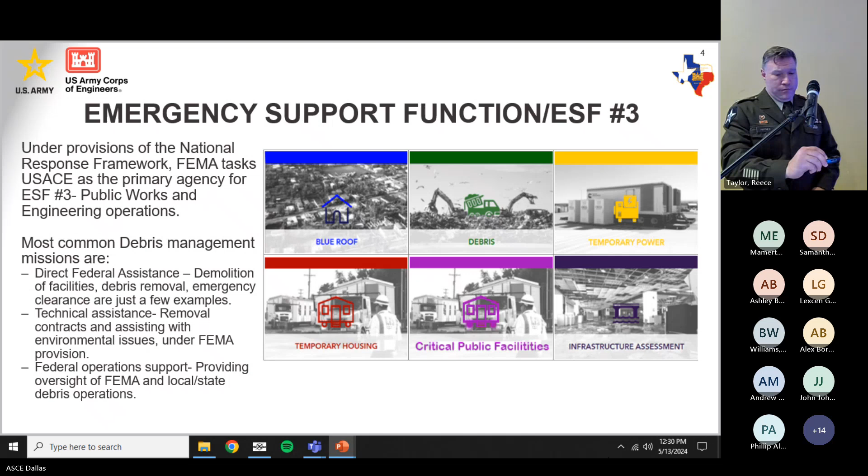Okay, so we'll get into the timeline in just a minute, but for everyone who hasn't been to Maui or Hawaii, this is kind of what we're looking at. The Lahaina area is the one that's been impacted the most. There were a number of wildfires that popped up throughout the island of Maui. Lahaina is important because it was actually the original seat of power for the Kingdom of Hawaii before they became a state. They have a number of their ancestors born and buried there. It's very interesting.

Right off of Lahaina, they have a birthing stone where the future kings and queens of the kingdom were born. The mothers would go out into the water, and there's a flat rock there—it's very, very impactful.

And then we have King Kamehameha the Third—he was buried there in Lahaina. It was the seat of power for a long time, when King Kamehameha brought all of the tribes and clans together and made it a unified state. There's a lot of history and culture there, and the culture of Hawaii is deeply connected with their ancestry. We have a number of public leaders and personalities that we owe it to, to preserve that lineage.

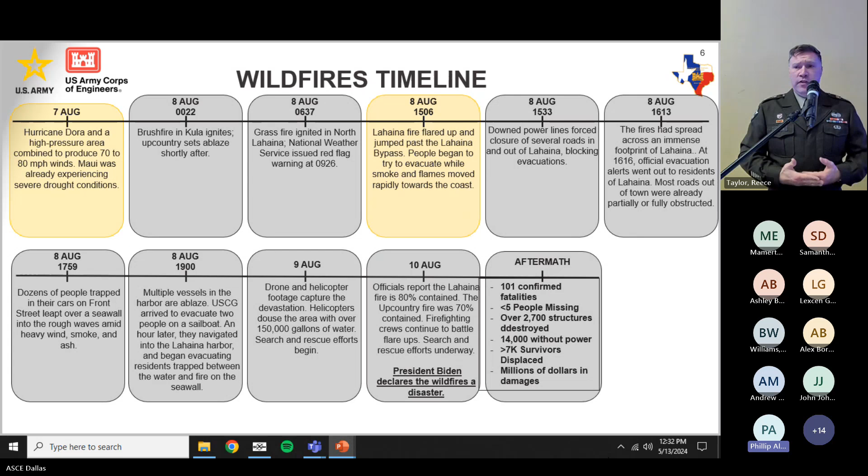So the timeline very quickly, the fires kind of sparked up on 7 August. Myself and my emergency management chief, Mr. Jeff Mahaffey, we deployed out there with the initial response team on the 12th or 18th of August. The fires were still occurring. We understood the impact it was having and the likelihood of it being declared a national disaster by the president, which would free up federal resources to react. We wanted to get the lay of the land and see where our folks would be, where they could immediately help, and what the mission was looking like. By the 10th, the president declared a national emergency, and it was in full running mode with FEMA as lead on the 11th.

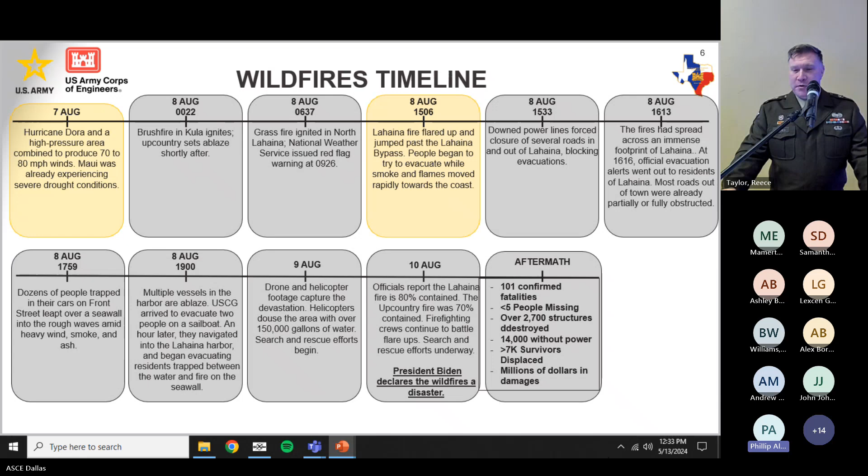And we can go through - I mean, any one of these briefs can last all day, so I'm purposely hitting the waypoints, the wave tops. This is another depiction of the timeline.

We sent our initial debris response, and what that looked like was about a 6-member team ranging from a project manager to project engineer, real estate specialist, contract specialist. We got out there because we don't do anything by ourselves. The Corps doesn't. We entrust and depend on our local partners, as well as the community around us, to give us the contracting capability so we can execute the mission set that's been given to us.

Key takeaway here - on November 3rd, we also got, so FEMA, because we didn't know what the requirements were and what the state could handle. When we get the mission set, it's really a negotiation between FEMA and the state. Texas is really good about executing their own mission sets, and then they raise their hand and say, can y'all help us out with one or two things? Other states are not that way because financially, they depend on the federal government to execute some of their mission sets. Hawaii is in that realm where they don't have the contract capability, the labor pool, the equipment, or the functions and mechanisms in place to execute these mission sets. So it decimated Hawaii, Maui, and they didn't have that capacity to execute. That's when they reached out to FEMA, and it becomes a negotiation of what do you want us to do, what can you do by yourself? And that slide rule changes as time goes on.

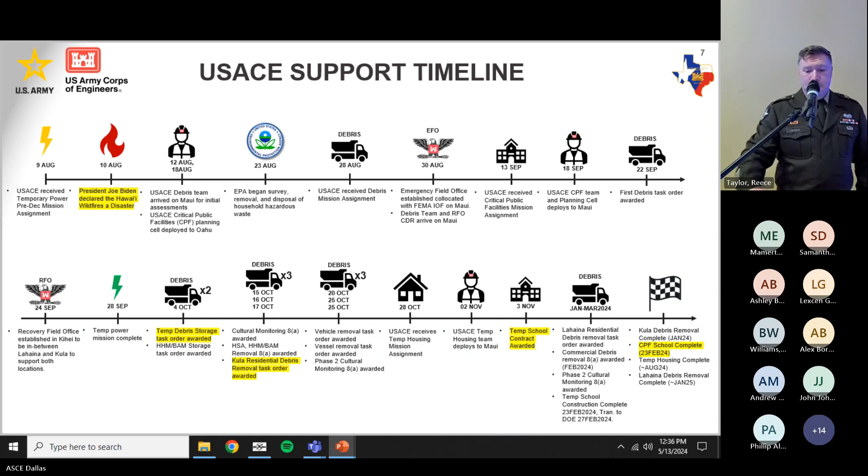This was taken a couple days ago, so it's a little outdated. However, you can see that we've cleared the parcels, and when we say clear the parcels, there are certain requirements - you've got 3 standing walls, that's a domicile, a facility, a building, and we want to leave that as best we can.

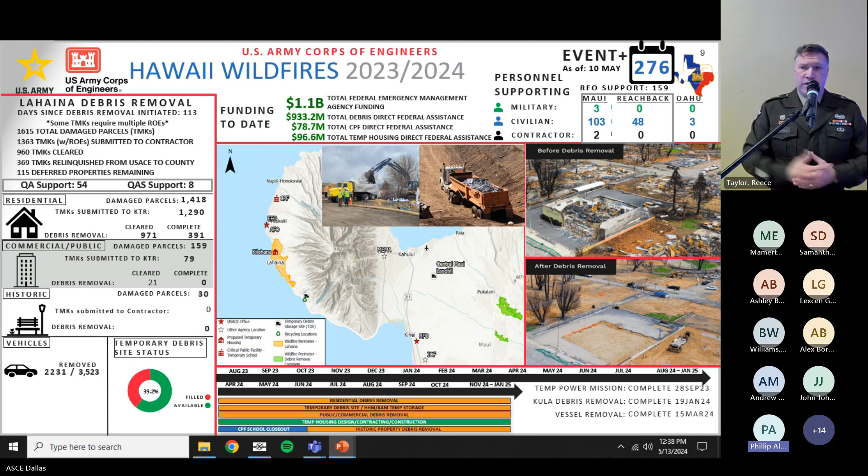If it's got less than that, we will clear it to the bedrock, or to the dirt, or to the foundation. It really depends on what was there first and what it needs to be, but we want to make sure we do it responsibly. When we return it to the citizens and owners of that property, they're able to build as they'd like on a new piece of property, working through the state and private sector to reestablish their homes.

Of all of those, Hawaii is very, very interesting. They don't have AC because it's a tropical environment. What they do have is usually just window units, but that was offset and mitigated by the crosswinds from the windward to leeward side of the mountains. Think east and west - the normal flow goes from east to west, and they have jalousie windows, the ones you crack open, to really cool things down.

That kind of helped. That was one of the reasons the wildfires got out of control so quickly - there was a tropical depression, a hurricane down south, and it was causing that spin and just fueling the fire. This school system only had one building that was untouched, and even in that building, the electrical conduit had melted. It was gone. So we've reestablished that.

You can see here on the 23rd of February, I think I was there again - that was my last day on Maui. That was the day we recommissioned and gave it back to the Department of Education there in Hawaii. Again, point being, we're training, we're teaching the kids that are going to be the new generation. To have that quick turnaround is not normal for us. We will go in and rebuild a facility and our timeline's 5, 6, 7, 8 years depending on the complexity of it for the Corps.

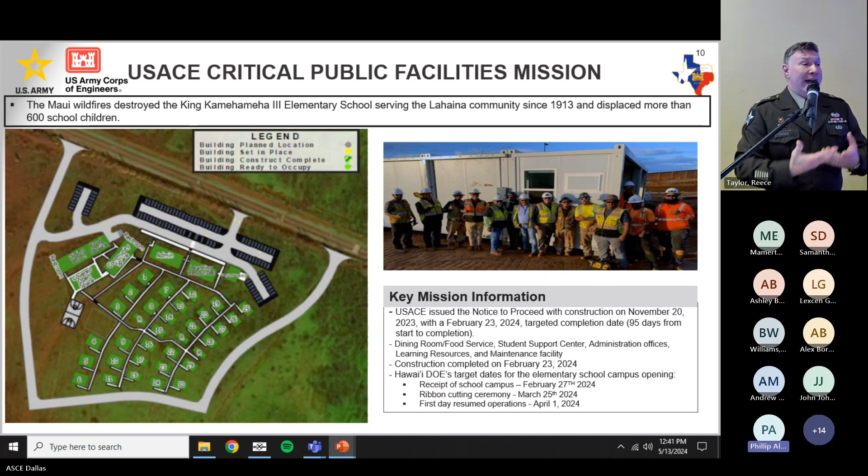Some of the other things we've established working on with this mission set is other critical infrastructure - we're building temporary homes. Some of that looks like relocatable homes, but we're having to bring all that raw material and resources from off island, and that's not something we can easily do. We're talking 500, 550 homes that we're trying to reset up in the northeast or northwest of the island, to ensure the economy gets back to the tourism they're used to, because about 80% of their economy is based on tourism. We're trying to help this community as quickly and safely as possible return to normal.

Okay, so again, that was a very quick rundown of what we're doing in Maui. I failed to mention, the debris mission set is a rotating thing - we have about 6 other districts within the Corps, and that's a rotating thing where they determine who's up next. On the Oklahoma tornadoes that just happened, the mission was given to the Kansas City district, and they're doing the blue roof mission, technical assistance, and technical monitoring to ensure they're getting in there, cleaning up those communities and trying to return to normalcy as best we can.

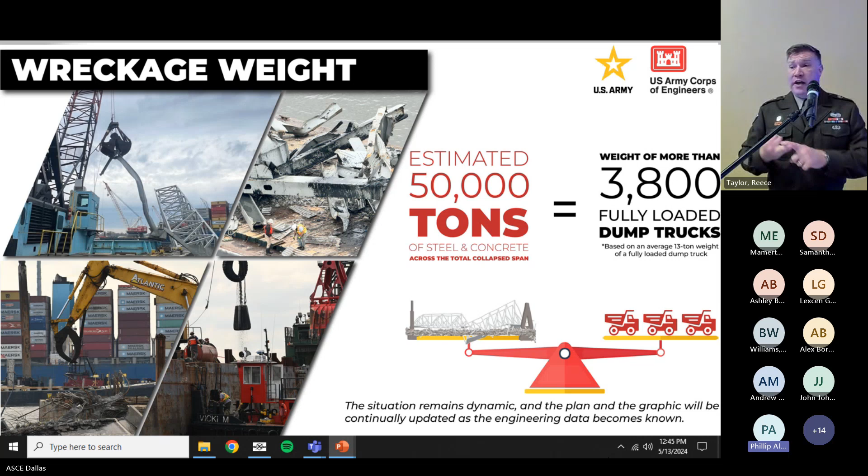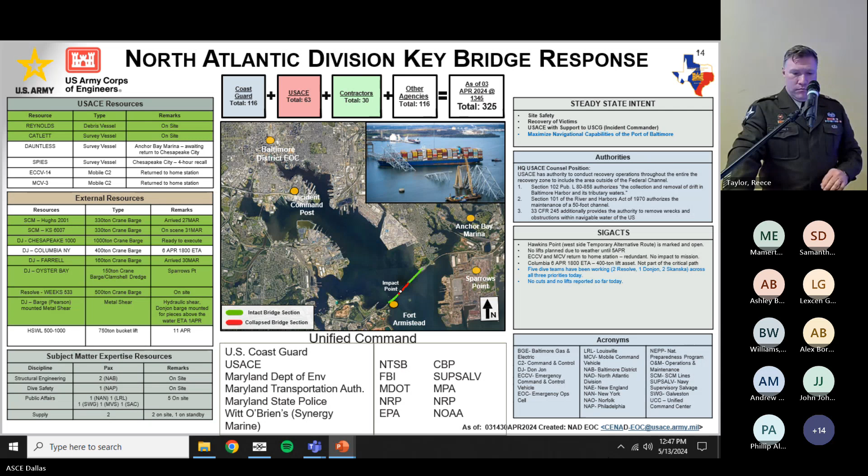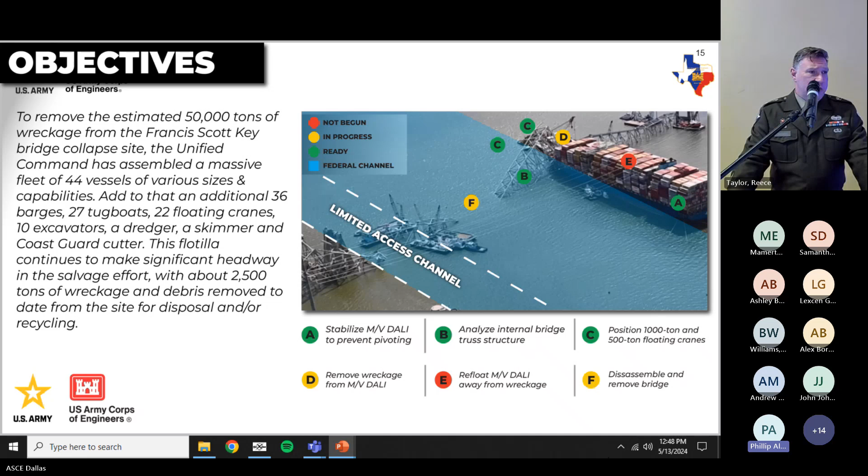This is a graphic that we use to capture the daily activities, where we're at on the timeline, and to quickly articulate what our objectives are: clear the channel, refloat the Dali, remove the remaining wreckage.

This is not the whole bridge, it's just three spans, and it's taking this much effort to fix this bridge. We're not even talking about rebuilding it yet. We can't, because we have to get the old stuff out of the way.

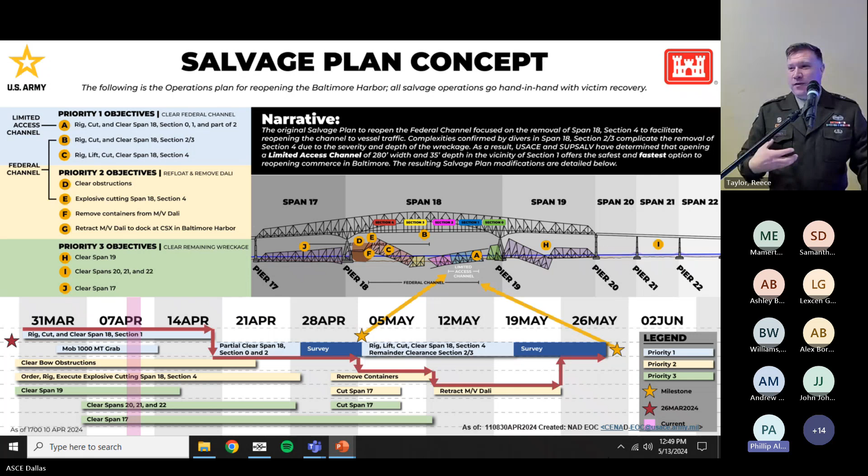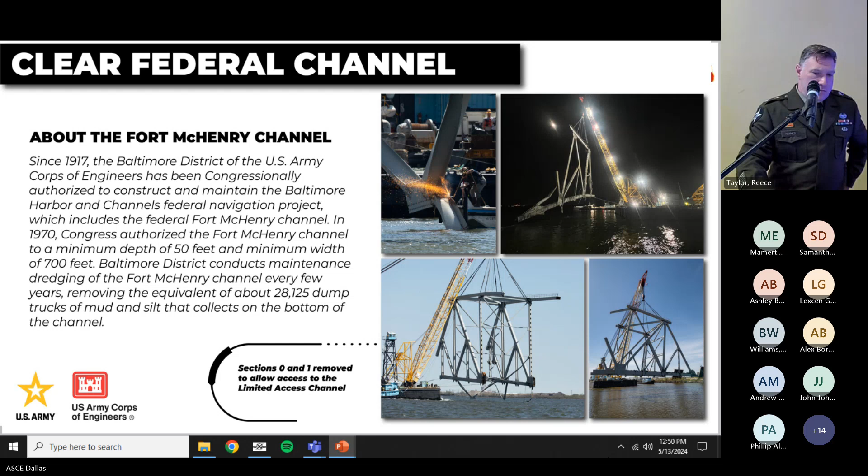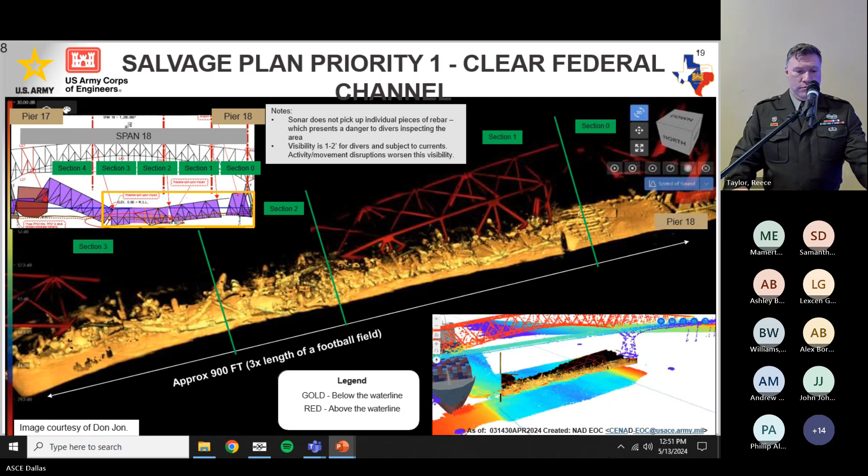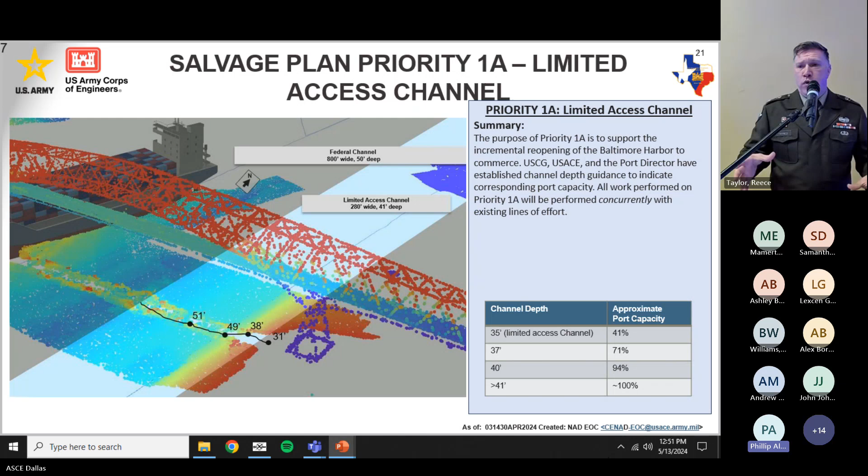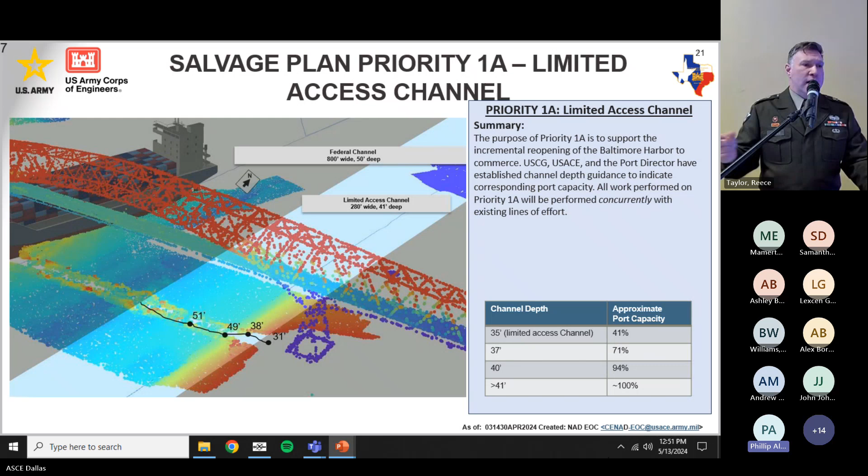Here's another visual. One of our immediate objectives was to clear the federal channel. We've taken that in bite-sized pieces, asking what we can do right now to open up and get commerce back into the port. We've partitioned it, looking at a limited access channel with a 35 to 38-foot depth so boats can get in and out of the harbor. However, our goal is to get back to the full 50-foot depth and use the whole channel. But this will allow us to start executing business on a limited basis.

For the magnitude of the problem set: that little circle up there, that's a guy standing there, and this isn't a small problem. Physically, it's not a small problem. Looking at the tonnage involved gives us another snapshot of what we're dealing with.

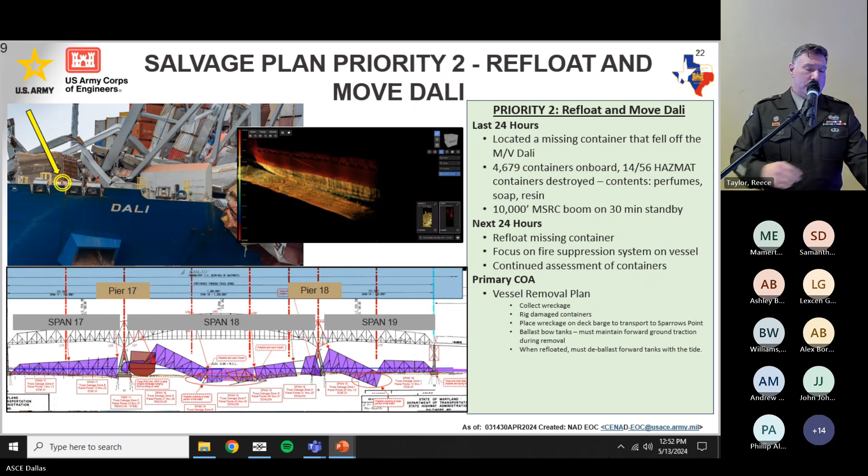So, dive operations. As Army engineers, one of our aspects is Army diving. We have divers in the water looking at this problem and trying to best choose the cut points they need without that thing falling on top of their heads. It's very dangerous. That very low visibility picture is what our divers are seeing underwater.

So they work in partners, a primary diver and a secondary diver, as well as video support. We have somebody on the seashore or on a boat nearby working with that diver to ensure they're not getting snagged on rebar or any jagged steel in the water. It's a very difficult mission set, and that's one of our tenets.

We don't want to put anybody in the water unsafely, and the environment has a say. If it's stormy - a couple weeks ago there was a pretty big nor'easter - we couldn't execute operations because our guys on top of the water couldn't operate safely for the guys underwater. The storm creates churn down there, which makes the scenario even more muddy.

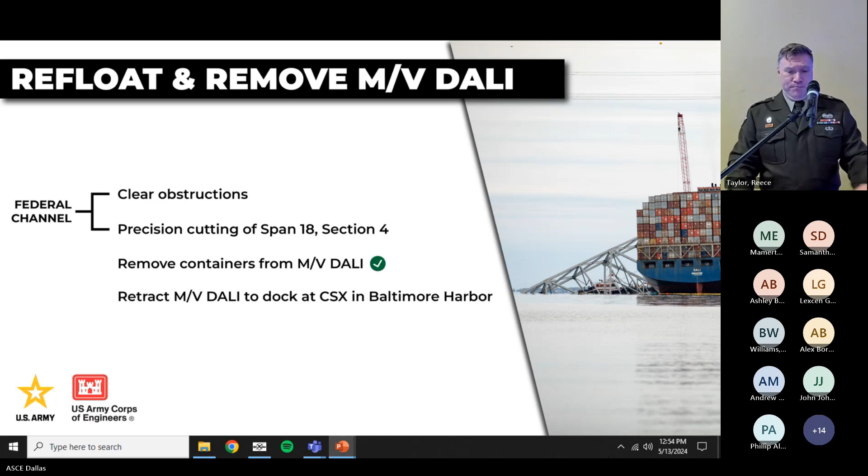You can see there how our guys take a very deliberate stance and approach to what we do and how we identify what cuts, how we're cutting, whether it be mechanical, explosive, or dynamic. We use all these techniques to ensure we're getting the right effect based on the need.

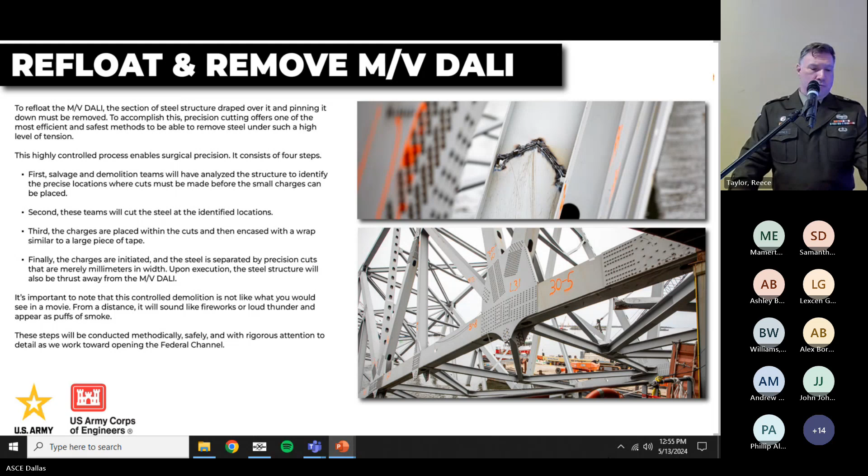This is kind of an overview of what we're trying to do. You can see there where the Dali is, what it is impacting as far as the main shipping lane, and what we're in charge of opening up. You can see where we've opened up and dredged some areas out to address that limited capacity for traffic in and out on the temporary lanes.

One of the ways we did that is we actually took a 100-ton dredge machine from Galveston, and it floated around the coast and is there in Baltimore Harbor to help dredge out and make that channel a little bit deeper. So it's definitely a holistic approach throughout the Corps of Engineers, and different districts are able to go out there, get some experience, and provide to the effort.

Who here is in media? I would offer all of us are, right? Because our friends over on the highways — if something goes bad on the highway and it shuts down that highway for 3 minutes, 3 hours on 35, who's that going to affect?

All it takes for us is one disjointed individual or team to jump in front of a camera and/or on social media to say, 'Hey, I'm being screwed over because of X or Y.' Going back to the Hawaii response, I had to laugh — it was kind of masochistic, but I had to laugh because of a situation we had. The media will reach out to anybody who's willing to talk and tell them something.

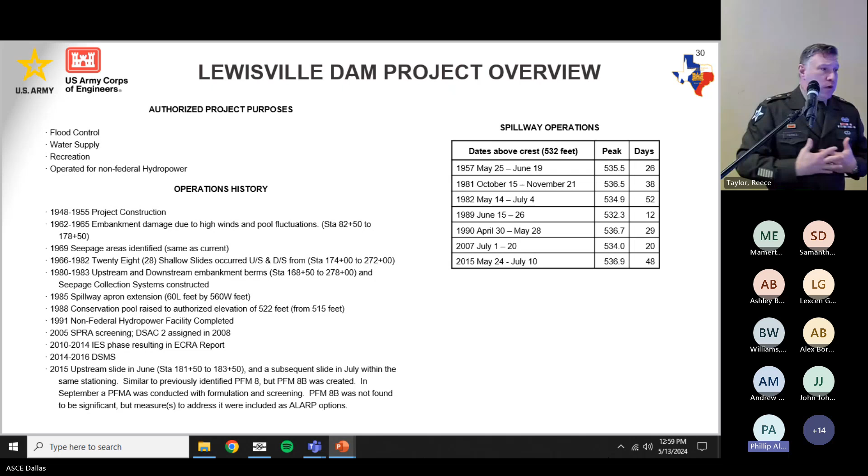Okay, so Lewisville Dam. A couple things — Julie did a really good job giving us the rundown of the project. There's a lot of stuff in there that I wasn't even aware of because it was before the Corps' time.

We were, as a Corps, established to be a flood fighting district, and that was due to all the flooding coming off of the Trinity, off of the Colorado, really impacting our environment and our communities downstream. So I'm going to give you a couple numbers, and it's going to be eye-opening, because it's a problem set that, if not handled properly, can get out of control really quickly, and then we're dealing with people's lives — and that's not something any of us want to mess up on.

So the overall capacity of Lewisville Lake right now is 940,000 acre feet. That has increased even since it began, from the 40,000 that was initially intended for.

What I also want to tell you is that our flood pool is 532 feet above sea level. So what that means for us is at 532.1, stuff starts coming over the sides of the dam, and that's when we're starting to put water in people's front yards. We don't want to do that because it impacts people's livelihoods.

However, our water management plan and our water management division, in correlation with the emergency management environment of Dallas and surrounding communities, we constantly talk back and forth. And there'll be a number here in a minute that, if let go, if kept unmanaged or mismanaged, is going to impact a lot of people and cause a lot of damage.

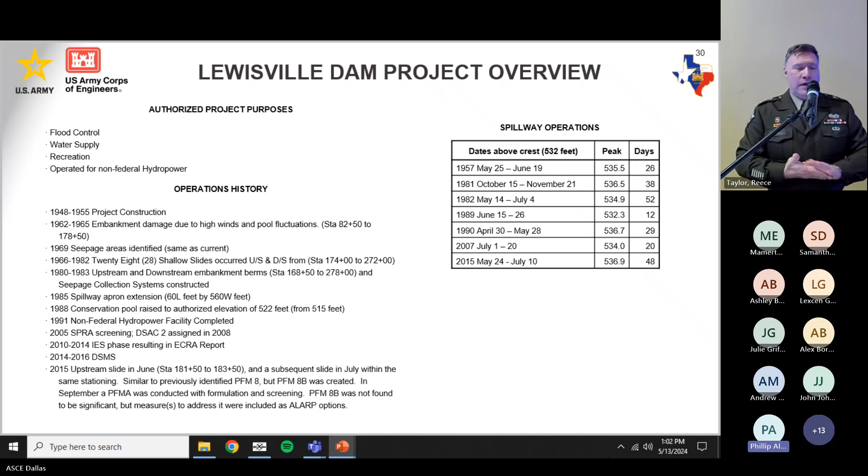That resulted in another study called the DSMS, the Dam Safety Modification Study. We understood that at that point, 2016 give or take, the dam was about 50 to 60 years old. This dam was built with about 70-year technology, and we've made some improvements since then, I hope, and increased efficiencies. So it was established for flood control coming off the Trinity, like it was stated, and for the water supply, the main water supply of Dallas.

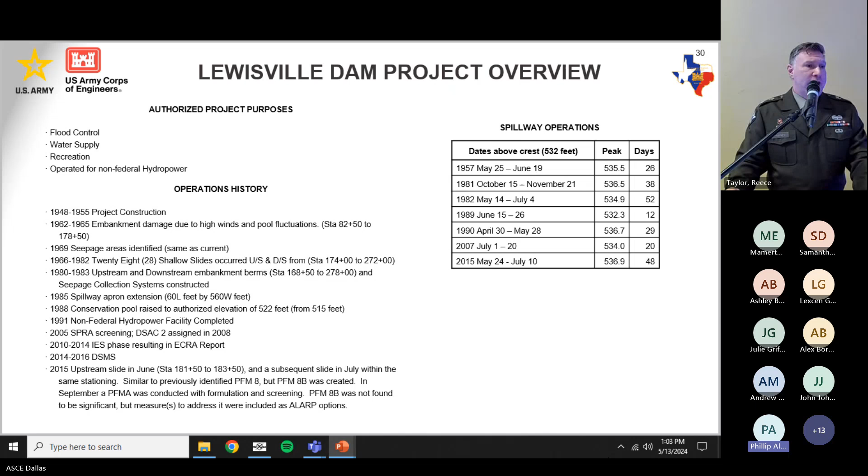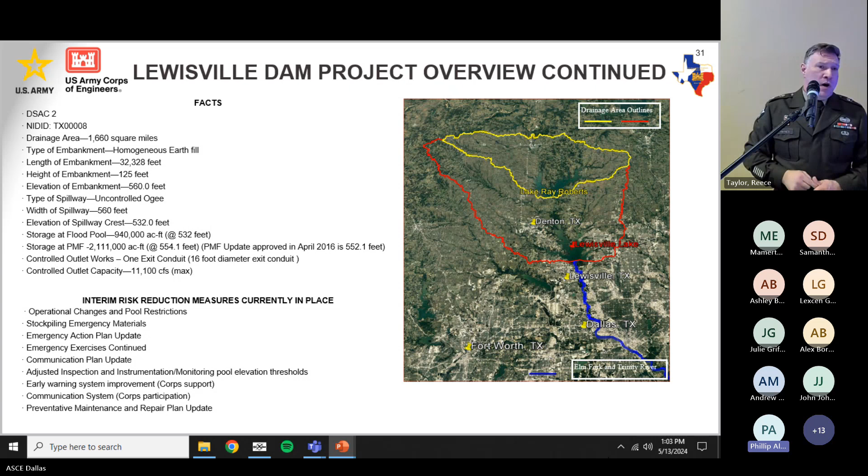We put this one up here because Julie alluded to it, or really said it. We have a system of retention ponds, or flood management lakes, that range from north up at Lake Ray Roberts all the way down to Benbrook and Grapevine. It's a system that's been put in place to manage flooding. We're still learning how water will react to the new obstacles we put up there, and just a little tweak here, tweak there can change things quite quickly. We understand we can help people and keep water where we want it to be, not elsewhere.

In general, the Fort Worth district manages about 25 lake reservoirs throughout the state of Texas, about a third of the surface water. Of those 25 reservoirs, it's multi-use, multi-directional in how we interact with that environment, whether it be recreational, water supply, or flood risk management. Those are the types of things we're looking at. We were established as a district in the late 40s to manage flood risk in the DFW greater area, and we've since expanded out.

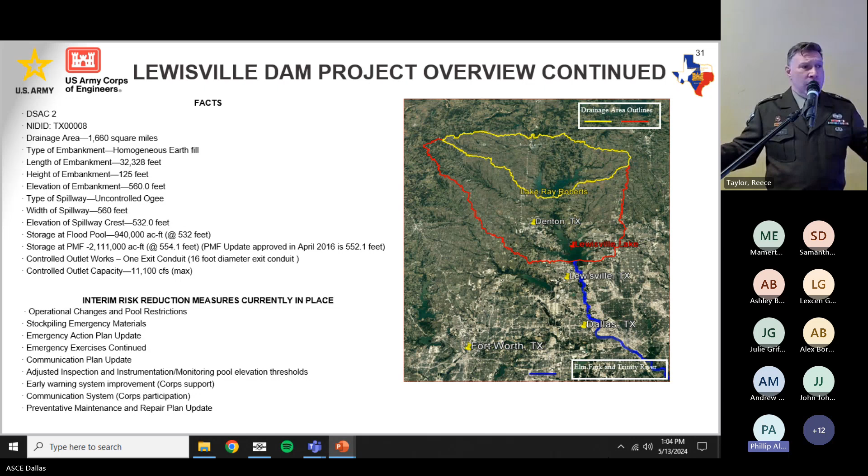So during the DSMS, the Dam Safety Modification Study, we identified two risks for Lewisville Lake: one listed as PFM 4, and PFM 6 and 7. PFM 4 is internal erosion to the dam itself, with back eroding and possible outcomes of that, as well as PFM 6 and 7 relating to weir stability on the spillway itself.

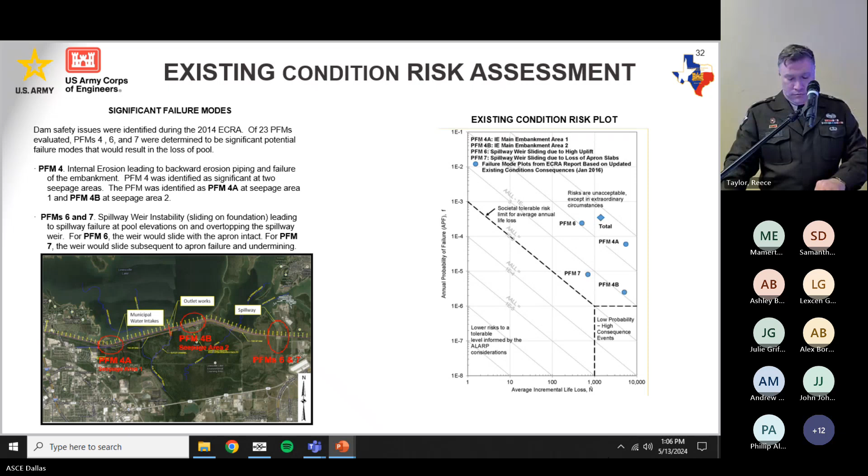And again, why are we placing so much emphasis on this one dam? As stated previously, it's the largest dam in the Dallas-Fort Worth area, meaning it's going to be the most impactful if something bad were to happen.

We're looking at 421,000 people in the inundation zone, to include downtown Dallas. Of that, we're looking at $23.4 billion in potential damages, both private and federal. These numbers are from a study, I think in 2016, so you can imagine what inflation has done—we're probably well north of that. But this is why it's important, why we're putting so much emphasis on this one project to ensure we're doing it the right way.

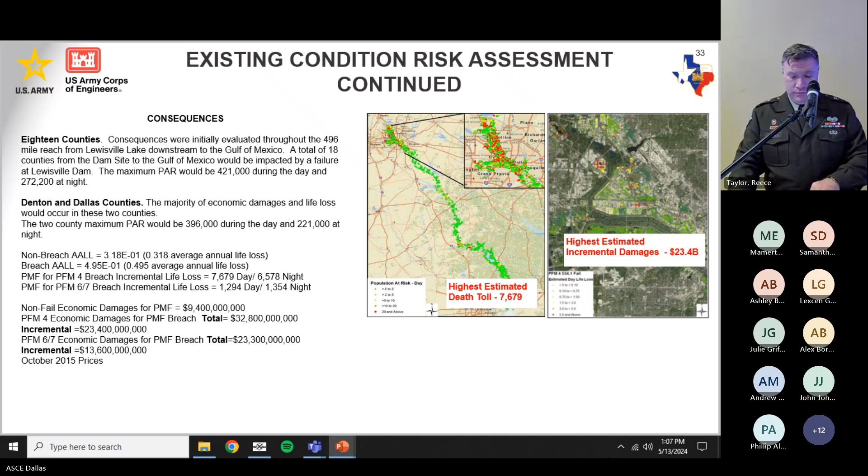We have yearly assessments on this project as well as all the other dams and levees we manage. In concert with surrounding areas that we don't own, but that could negatively impact the economy or the people nearby, we work with local communities to ensure they get inspected and things get addressed. We have a very robust assessment team that goes out on a rotational basis to talk with all our private and public partners in the surrounding areas.

And again, the goal is to reduce the risk, the probability of an uncontrollable release of water. We all know what that means, right? We want to make sure the system in place is sound and it doesn't fail.

A couple things we consider are protection of life, protection of property, economic considerations, and environmental considerations. Those are all tenets we address through our process, and we keep them in mind when our assessors go out to look at these projects.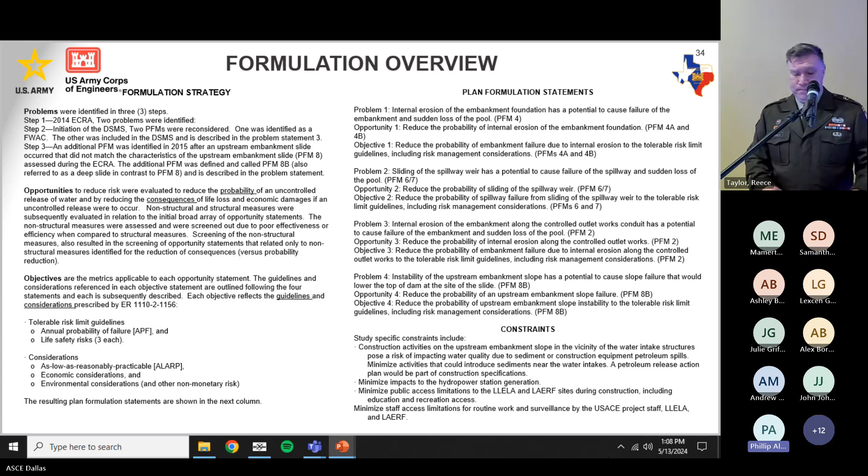See here, this is a chart we use to address and provide some of the mitigation measures for the PFMs.

The Corps of Engineers, Fort Worth District specifically—our sole purpose is to protect life, provide safety, and we prioritize that. Now, when you're going into a project like this, it's hard to weigh whose life is more important, so we don't. We bring in other criteria that we assess the risk on, and then we address as necessary.

We don't do that in a vacuum, we don't do that in a stovepipe—we do that with our partners. We go and talk to the Dallas city managers, the Grapevine city managers. I cannot emphasize enough, one of my takeaways from this job is how much we communicate what we are doing with our partners to ensure we're all on the same page. Nobody gets caught flat-footed, and everyone has the ability to react if necessary, or to tell their populace what's going on with the projects and what their reactions are.

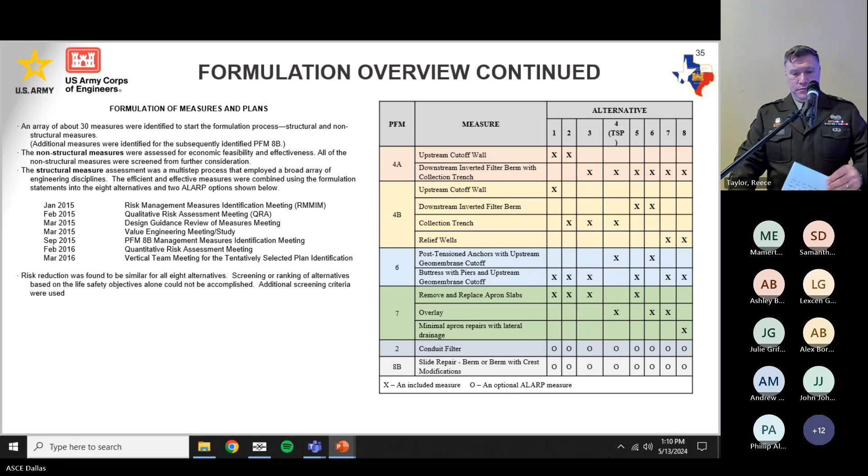So this is something we provide to Congress, because we do not lobby Congress for work. We are a federal entity in the DoD, right? So we provide this from our studies to say, hey, this is what we're dealing with. Our congressional leaders take a look, we provide this assessment to them, we tell them why it's important, and then they tell us what is important.

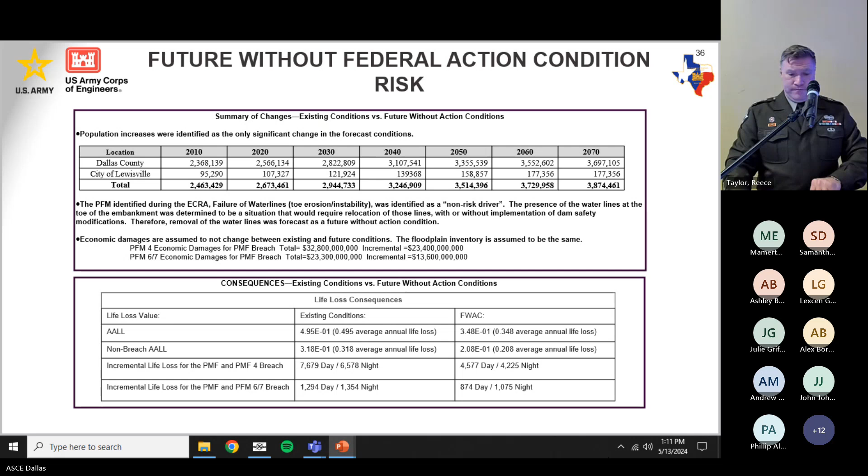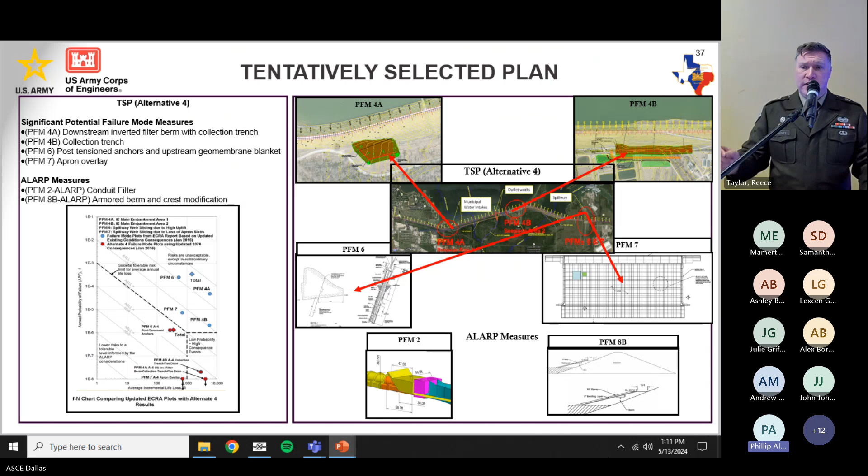So it says tentative plan up there—I took this from a dated slideshow. But what this provides is the systemic approach we use to address the issues identified during the 2014-16 dam safety modification study, and how we're approaching this problem set.

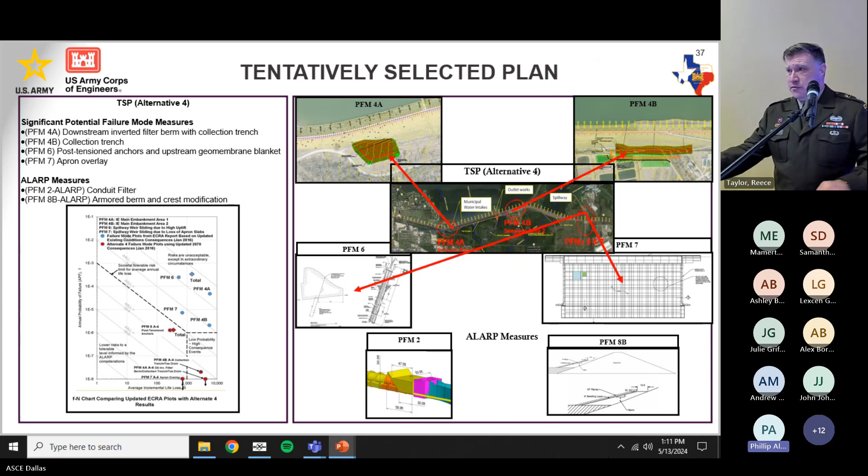We're about to go really fast here. So the first phase is complete, and the second phase, the PED construction, is the actual installation of the anchors that we're using.

I want the number 175 to come out in my mind. So we've got 175 75-foot anchors that we've drilled down into the ground through the spillway to make sure it gets stabilized. And of that, we work with the industry to figure out what works. Introducing water into a closed environment, i.e. the spillway, that's bad. You get backwards erosion, and we don't want that. So we work with industry to figure out how do you drill 75 feet down without water through concrete.

There's a number of methods that we've used, whether it be gels, and understanding the concrete that was poured in the 40s wasn't reinforced, so we want to make sure we capture that and address those issues through individual techniques via trial and error, but not on the site itself. Our team has really worked well with each other, and it is a team effort of how this is getting addressed.

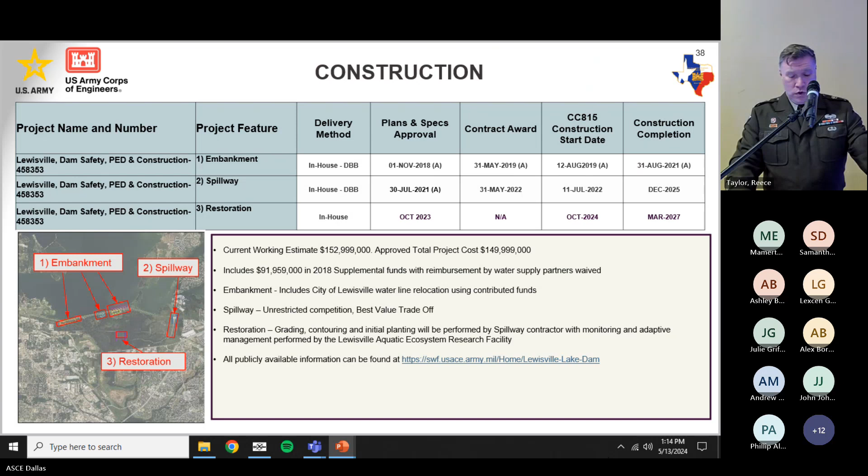Like I said, the purpose of our district is to provide life and safety, and it is paramount to what we do in everything that we do. Protect property—those are all parts of the calculus that come into play.

We constantly ask for feedback from the industry to see what we're doing, because we don't do this by ourselves. There's very little we can do by ourselves, without the authorities. So we exist to ensure water doesn't end up in your home, or if it does, it's mitigated to the point where it's manageable. We work with our local community leaders and our communities in general, because our folks live and work in the area.

We've got about 1,200 employees that work for the Fort Worth district. Only a small fraction of those wear a uniform. So the other 99% of folks that work in our district live in our communities. So it's kind of self-serving that we do this the right way.